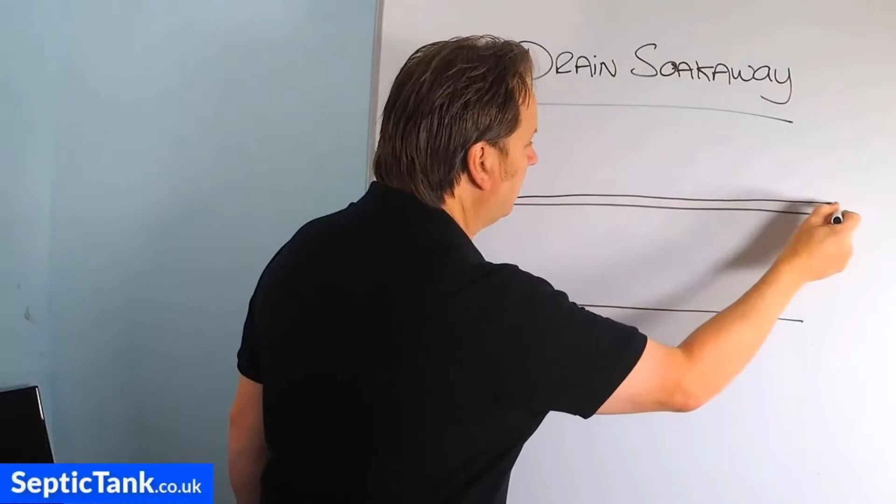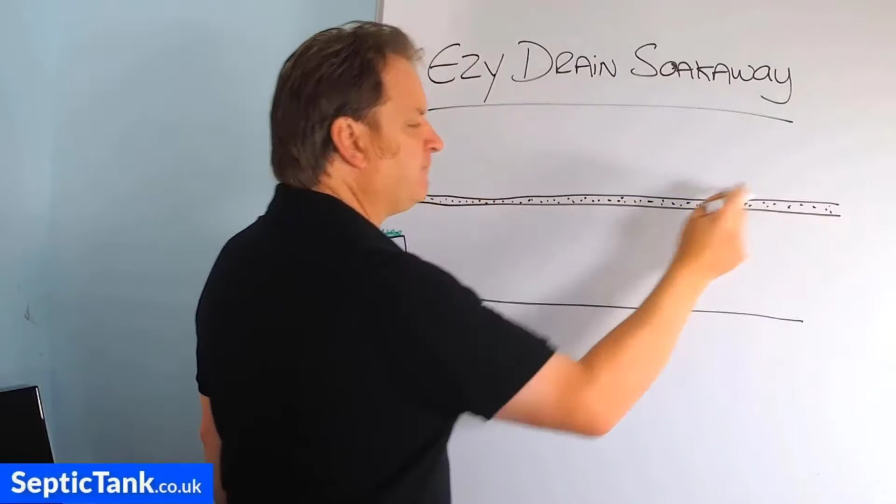So let me show you a cross section here. So when you're laying down a traditional soakaway, the first thing that you put down is a bed of gravel. Now this gravel can be 20, 30, 40 mil shingle. But the point is, the traditional way of doing it is that they would put down a gravel bed.

On top of that bed, they'd then put the 110 mil orange underground pipe. And these pipes will have a slit in the underbelly of them. The slit's there because it's designed to let the water out as it runs along the course of the pipe.

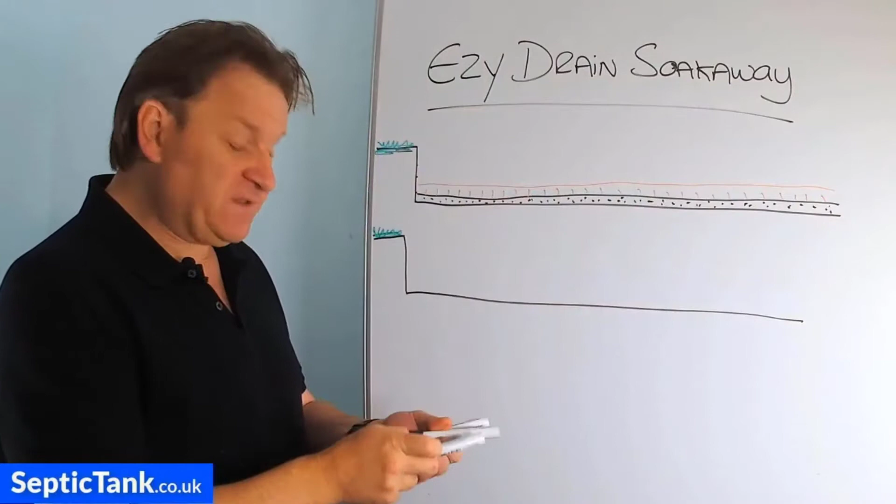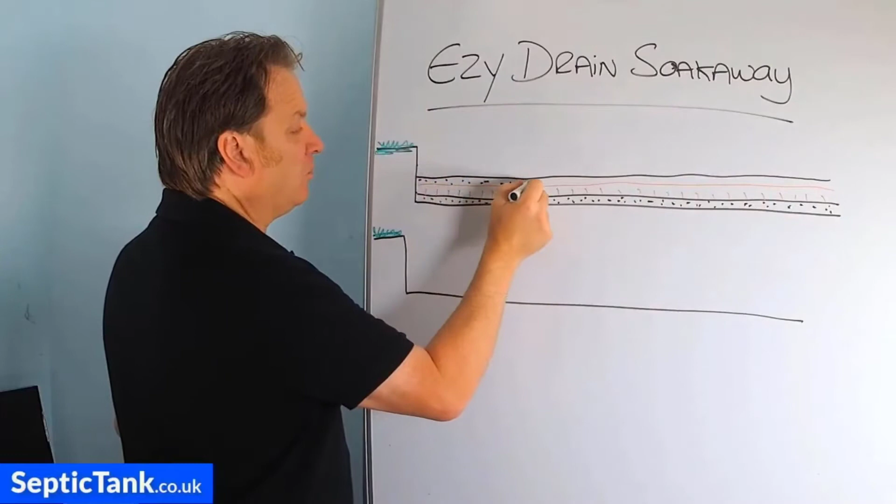Once you've done that, you've then got to put another layer of 20 to 30 mil gravel or shingle on top of the pipe. Then on top of that, you then put another layer of membrane. Now this membrane basically is designed to stop the soil which goes on top of here.

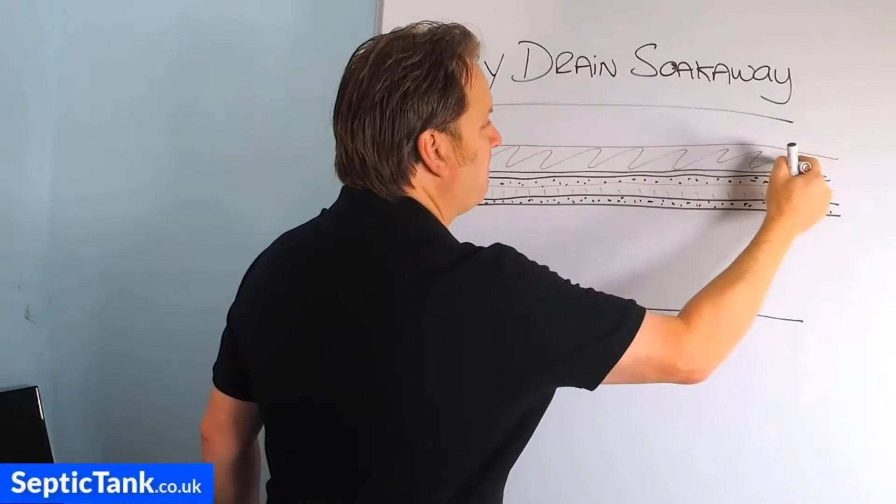So that's the soil, say. So that membrane is like, I suppose, a damp course, something like that. But what it does, it actually stops the soil from filtering down into the gravel, into the pipes and blocking it up. So that's traditionally how a herringbone system is done.

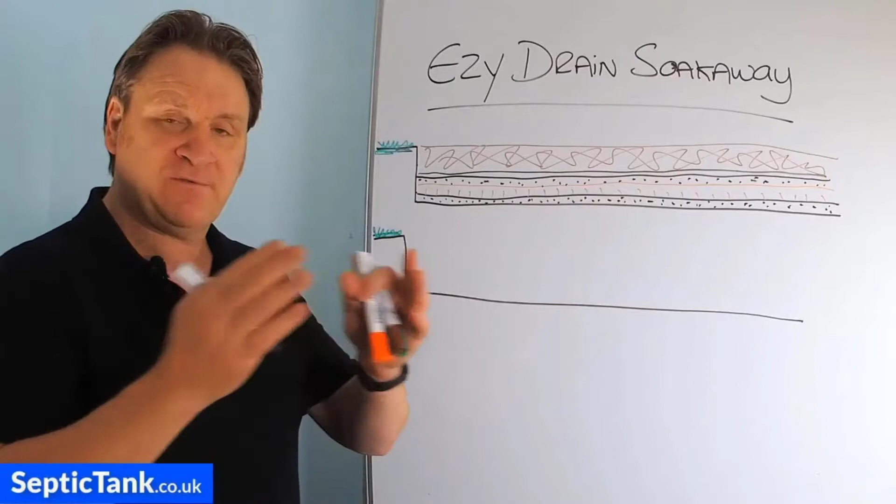So you imagine you've got a massive area, like half the size of a football field, something like that. You've dug it out, maybe into trenches, maybe you've dug one section, and you've laid a whole network of pipes, right?

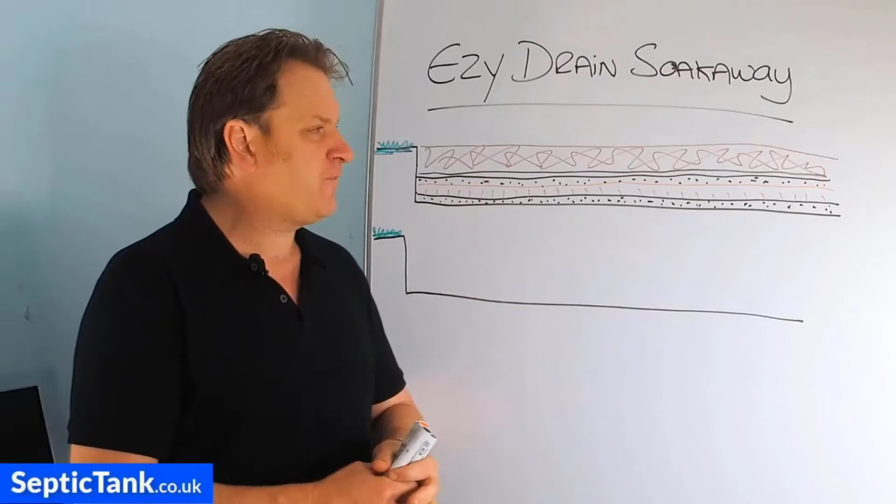They come and they drop a massive pile or mountain of gravel off. You've then got to get that gravel to your work area. You've either got to do that in a dumper truck with the digger buckets, wheelbarrows, but it's labor intensive and it takes time to do.

The pipes, these slotted pipes can cost you like 15, 20 quid for a 3 meter length. So if you're using 30, 40, 50 lengths of that, you can see it's starting to get expensive. Then you've got to go back and put gravel all the way on top of it. Then you've got to lay your membrane.

These traditional herringbone soakaways could take at least a week to do - to dig the hole, to lay all the different levels in there, to cover it over with soil. And then it's a very labor intensive job. It's a very expensive job.

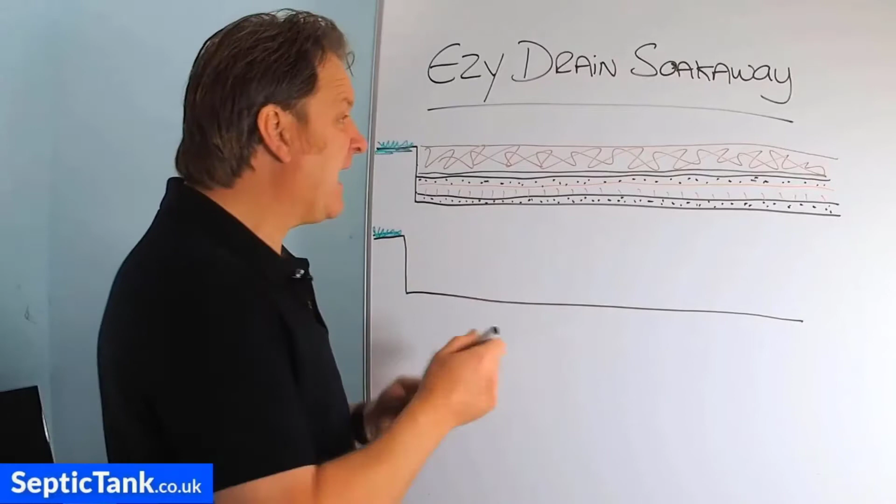And that, nevertheless, is how people today used to construct the herringbone soakaway. So the herringbone soakaway has been popular for about 50, 60 years now. But it is just one way of doing the soakaway.

There is no rules or regulations as to how you do your soakaway. Part H of building regs is just guidelines as to how to get the water from your soakaway to soak away - that's just one serving suggestion if you want to call it that. The Germans a few years ago created something absolutely amazing called Ezy Drain, which has revolutionized the soakaway industry. Completely revolutionized. So let me show you what they've done.

So again, here's your trench now. This is your modern soakaway that you're about to put in with the modern soakaway product called Ezy Drain. Ezy Drain comes in 3 meter lengths. So let's pretend that's your Ezy Drain pipe there.

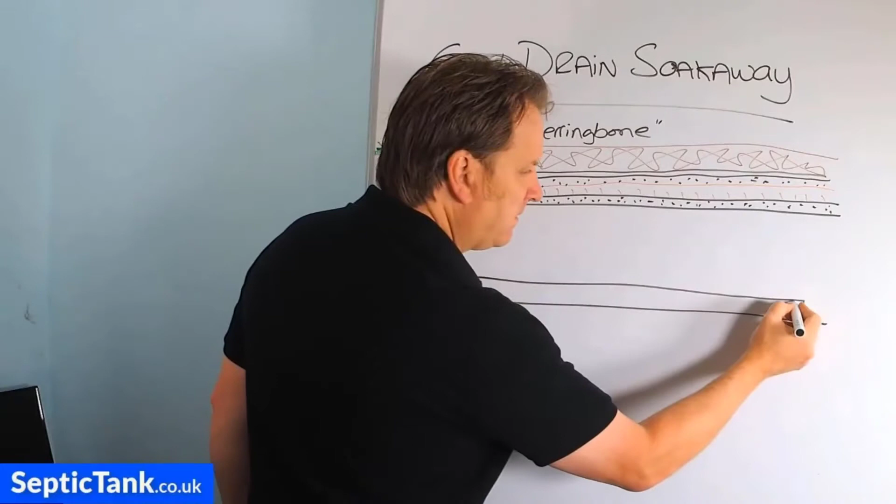Now you'll notice that there's no shingle bed under the Ezy Drain. These pipes come in 3-meter lengths. They've got, on one end, they've got a connector. Then they have got a female connector the other end, and they have got special space-aged membrane running along the course of the whole length of the pipe, which is 3 meters. That's it. So it's all about the membrane.

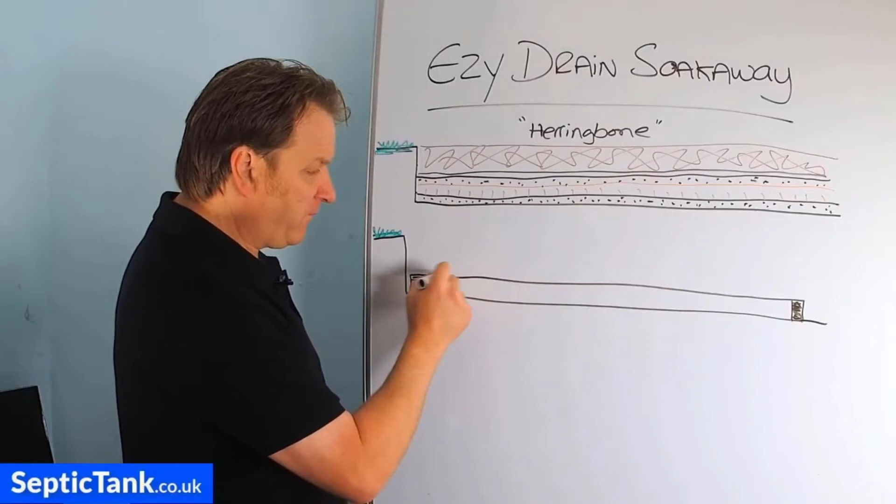Because the membrane has a particular flow rate, it allows and regulates the liquid inside the pipe. So inside, the pipes are perforated. There's millions of holes, number one, right? So why is that a good thing?

Well, if you look at the orange pipe above, the slits are actually just in the underbelly. So if they silt up, you're done for, aren't you? Because the water's then just going to travel all the way along to find the slits that aren't silted up, right? So once they all become silted up and silt travels along the bottom, you've got to replace your soakaway again. It's madness. On the Ezy Drain, it's perforated all the way along, millions of holes through the entire length.

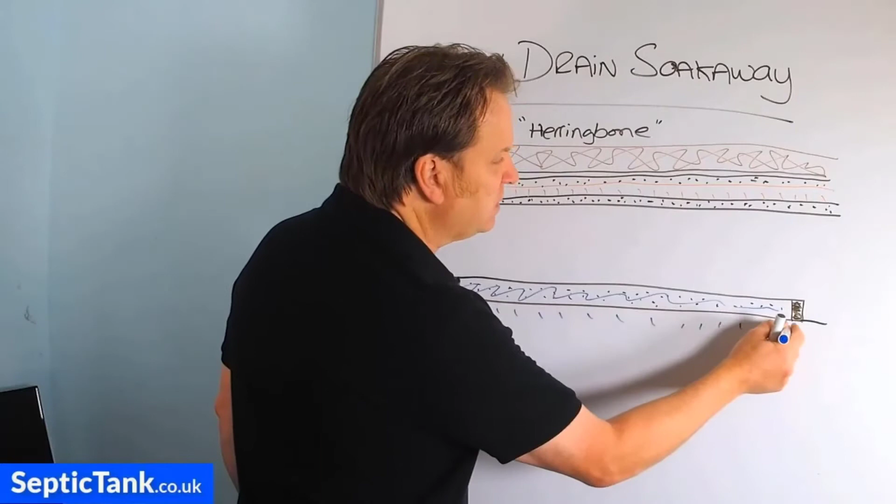On top of that, you've then got, as I said, a space-age membrane. And what happens is the water travels down the length of the pipe from the septic tank, and then the membrane slowly releases that water into the soil. Now, there's no need for gravel underneath it or above it. It's just a complete waste of time, because gravel acts like a reservoir, right?

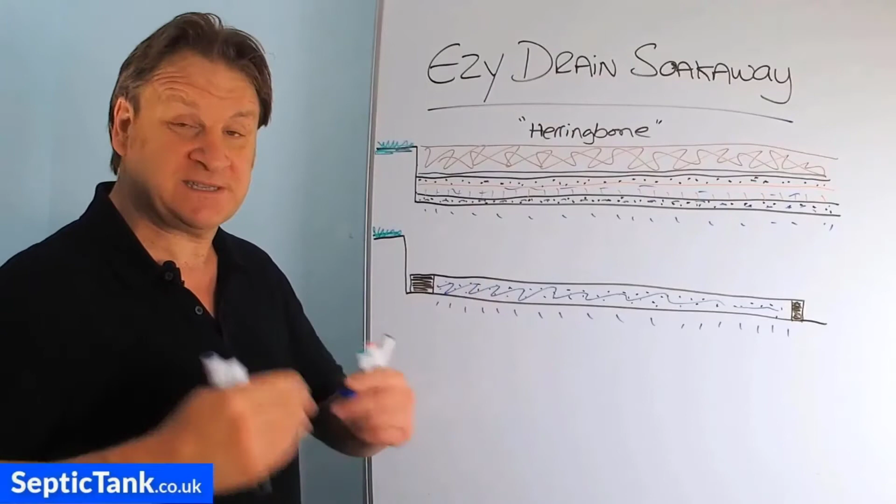So you've got your water coming down the orange pipe here. It will then sink into the gravel bed, which, as I said, acts like a reservoir, and then from there it's released into the soil. The Ezy Drain's better than that because of the membrane. It regulates the amount of water that comes out and the time in which that water comes out. So it's very, very clever technology. It's like a time release capsule, literally, right?

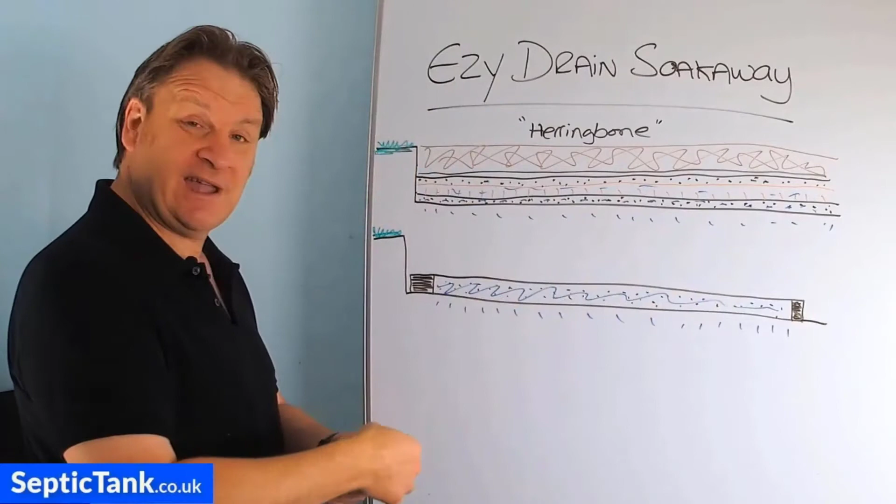And then once you've done that, you just lay your Ezy Drain down, no gravel required, so you can save yourself 1,000, 2,000 quid straight away. Then you just get your next bit of Ezy Drain and clip it onto the end there, right? So as quick as it takes you to dig that trench, that's how easy it is to lay the Ezy Drain. That's why they call it Ezy Drain. Then once you've done that, you just cover it over with soil. That's it. So that is basically how Ezy Drain works, right?

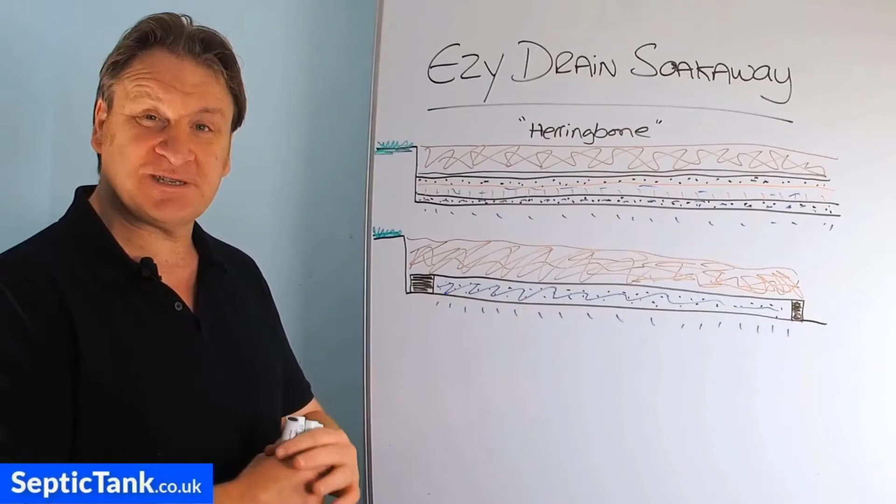You have to forgive me for my amazing artistry here, but that came on the market about 3 or 4 years ago. Many septic tank companies, soakaway companies now just go for Ezy Drain because they've realized that the secret isn't in all the gravel, isn't in the pipes. It's actually in the membrane. And this membrane not only protects from the suspended solids that can be found in sewage effluent, but it actually regulates the flow of the water coming from the pipe into the soil.

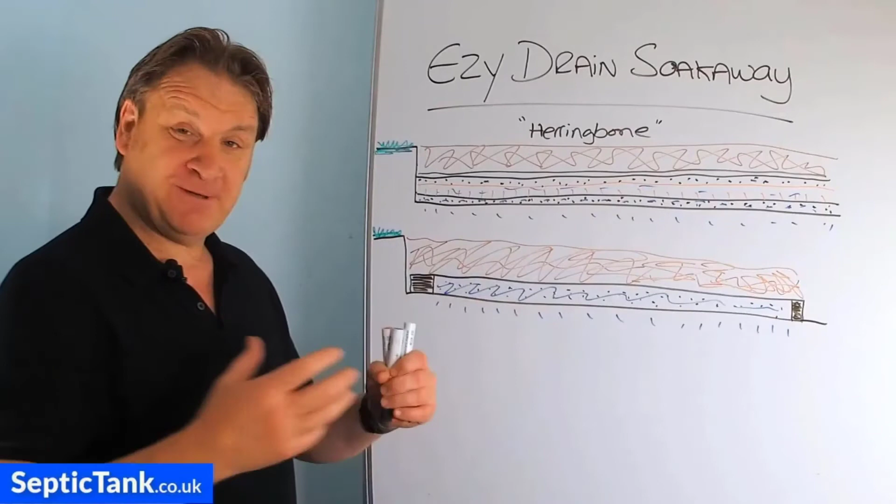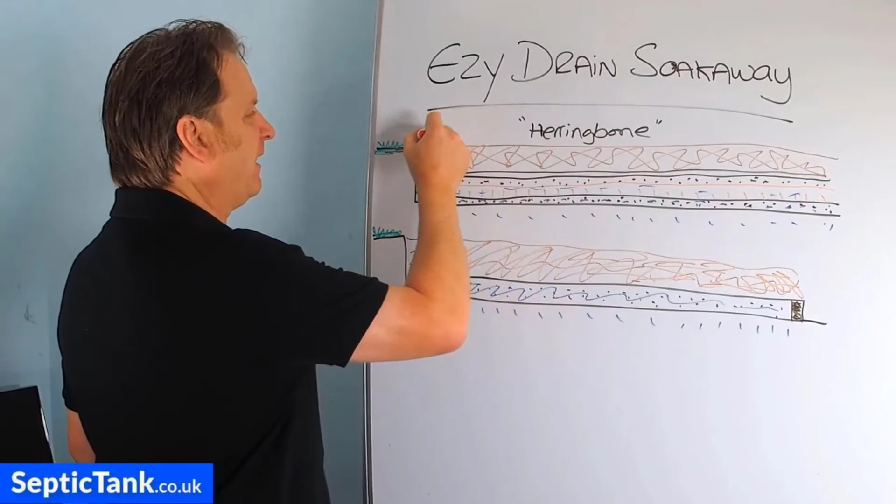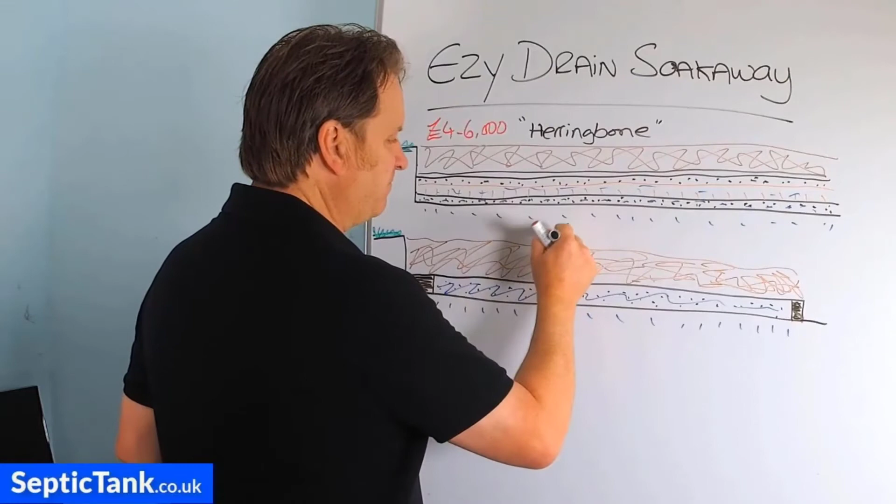So, price of a herringbone system? Well, you probably had quotes already. You can pay up to like 4,000 to 6,000 quid for a herringbone system, and all the bits and bobs and stuff like that. If you use the Ezy Drain, it would cost you something like £499. So they're like 5,500 quid cheaper. They take 5 times quicker to do.

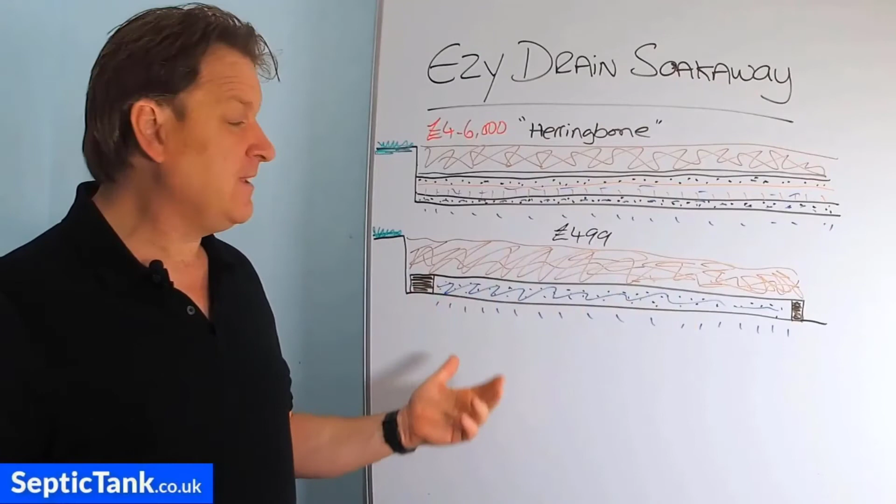How long did that take to do? That takes about a week to do, right? Or let's say it takes you 3 or 4 days. This takes about an hour, 2 hours to do. On, say, a 5 to 6 bedroom house where you'd need 20 sections of that, it would take you about 40 minutes, an hour to dig the trenches.

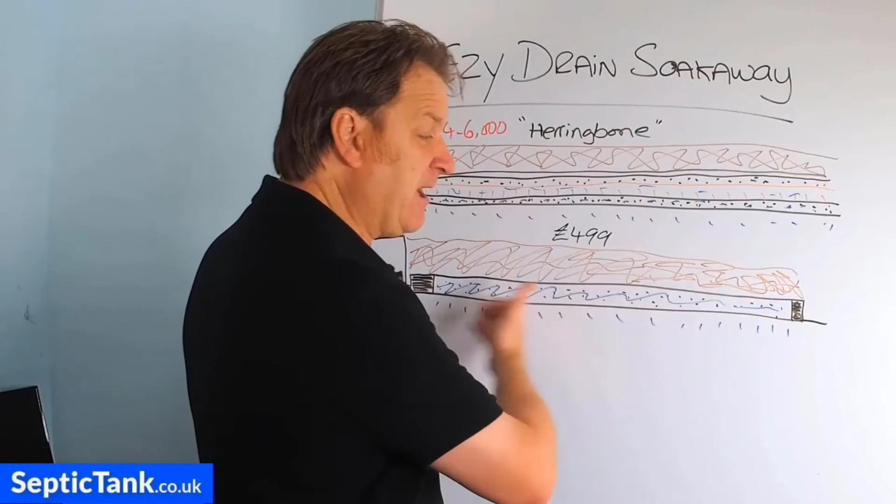It takes you minutes just to lay the pipes, clip them together, and then you've just got to cover them over with soil. So worst case scenario, it's going to take you about half a day to put your Ezy Drain soakaway in, compared to the 3 to 5 days of putting the old traditional herringbone system in. And with the Ezy Drain, you're going to save yourself at least 4,500, 5,000 quid a job. So there you go. I hope that's helped. So that's what Ezy Drain Soakaway is.